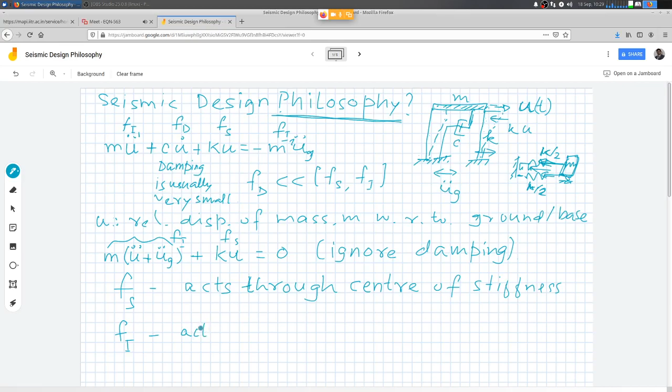Now tell me, these centers are points, right? So are these points coincident? May not be, sir. Okay, very good. So under what conditions will they be coincident? For symmetric structures, CS, center of stiffness, and CM, center of mass, coincide. There is no point in writing perfectly symmetric; symmetric is symmetric.

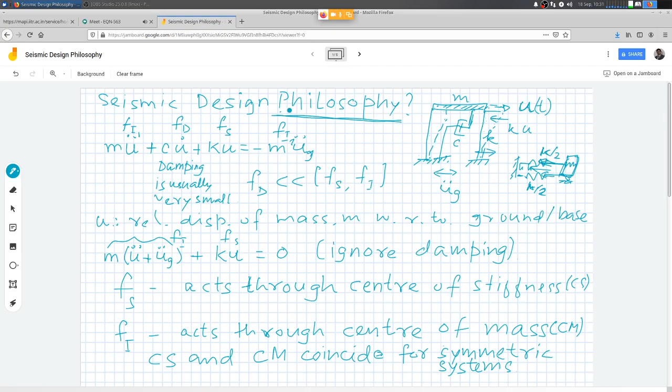For symmetric systems. Now what happens if they are not symmetric? So let me draw the hypothetical situation. It's not hypothetical, most of the time it is like that. For unsymmetric systems, let me just look at the plan.

Right, so you have one column here, one column here, one column here, and one column here. Now assume that these columns are of different dimensions, so that it is not symmetric. So this is column stiffness K1, K2, K3, K4 and so on. The slab is of course symmetric. So this is the centroid, what we call the center of mass, and let us say the columns on this side are a little more stiff compared to the columns on this side, the flexible side.

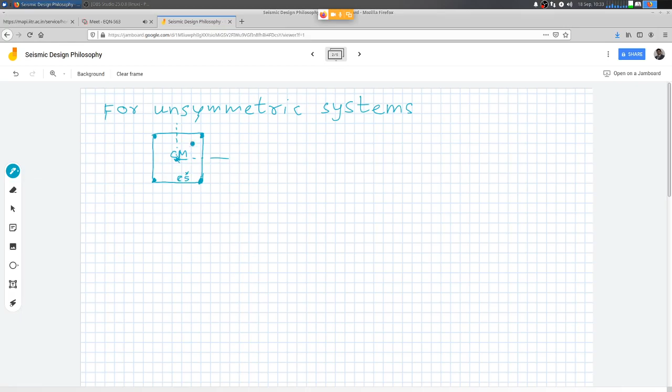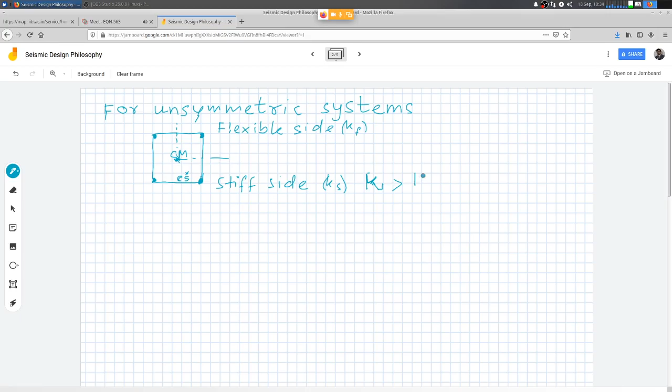So this is what we call the flexible side, and this is what we call the stiff side. So let's say KF, KS, and obviously KS is greater than KF. So you end up with the center of stiffness shifting towards the stiffer side.

Now before we go into this, if this is the direction of motion u, then Fs will act through the center of stiffness, right? And it has to be equal to the inertia force that we have here, that will act through the center of mass. So this is Fi. Now this is what we call eccentricity.

Now there can be eccentricity in the x direction, there can be eccentricity in the y direction. So if this is x, this is y, so this is Ex and this is Ey. And u is of course the displacement along the x direction, and there is eccentricity between the point through which the inertia force acts and the point through which the spring force, or the column restoring forces, act. And because of the eccentricity, there will be a moment, additional torsion.

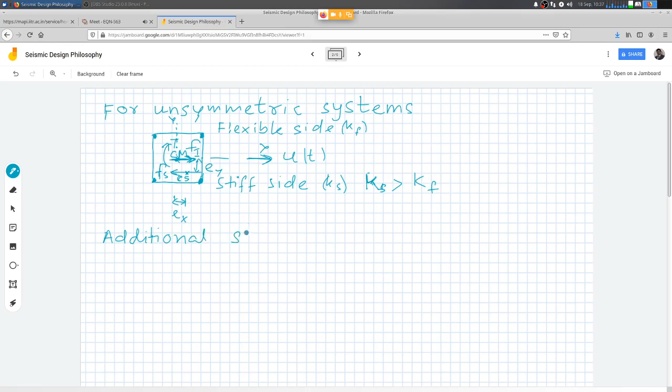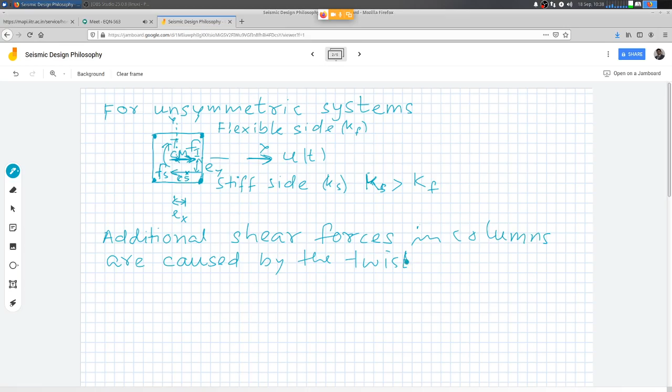So this torsion effect: additional shear forces in columns are caused by the twist on account of eccentricity between CS, center of stiffness, and center of mass.

Right? So if I had taken care during the planning of the facility such that this eccentricity is minimized, then I wouldn't have to bother about these additional forces in the design to withstand earthquakes. Now this is something very unique because this force is not coming because of any external loading. This is entirely because of the configuration, generated by structural configuration.

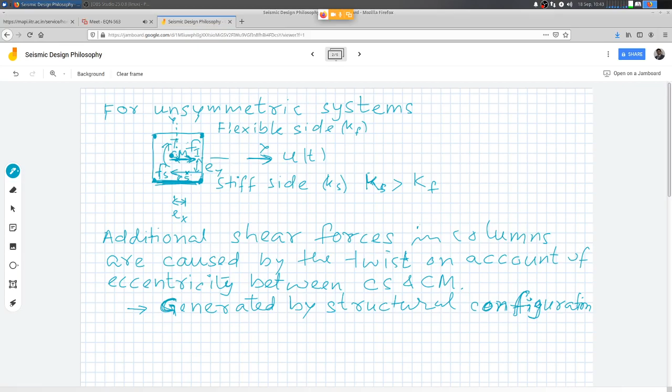Try to minimize it as far as possible wherever you can. And if you are aware of this possibility, then it is very much feasible to reduce this kind of unnecessary additional forces in design. Because it's not that we cannot design; if we can account for this, we can always design for these additional forces, but that is unnecessarily going to increase the cost of construction.

Just a minute. Yes. Okay.

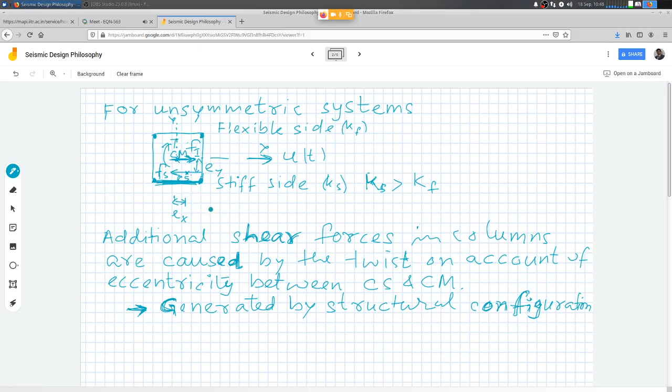So again, the easiest solution is to keep this possibility in your consideration when you are planning the facility, and that is why I always insist that structural engineers should always work on a project with architects right from the conceptual stage, right at the time of conceiving the facility architectural plan.

Otherwise it is going to be very, very difficult to come up with an economical structural solution to the problem, because most of the features that an architect will come up with are going to add to the eccentricity, and that is going to create problems later on. So we have this eccentric system. Now the other problem is, which earthquake do you design for?

Design earthquake, and more importantly, rather earthquake design criteria. How do you design to resist earthquakes? So what is a design earthquake? Any ideas?

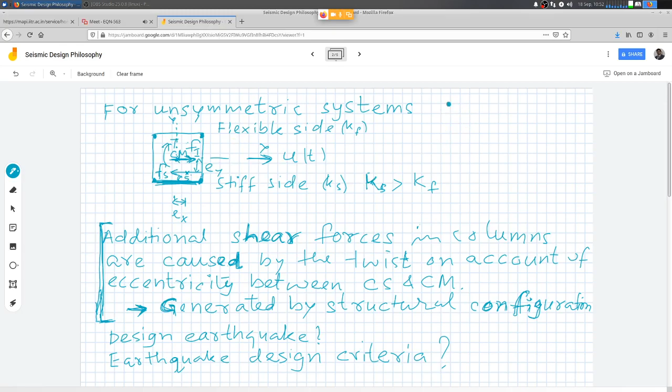Yes, so essentially you come up with what is called a design spectrum. There are different ways of defining a design spectrum. One is of course Newmark-Hall. That's the standard method of many design codes. Another one is the uniform hazard spectrum, where we make use of probabilistic assessment and come up with a design spectrum for the same frequency of occurrence, exceedance, right?

So that's how you come up with these 475-year return period earthquake and 2475-year return period earthquake and so on, right? All those are based on some probability models. You can derive the basis. You can come up with those numbers when you go into the probability models.

So the idea is you define the design spectrum for the site you are considering. It will be site dependent or zone dependent, and according to that site you pick the design spectrum that will characterize the earthquake ground motion to be considered for design. Now, for that design level earthquake, if I am considering a uniform hazard spectrum, the Uniform Building Code or even Eurocode talk about a 475-year return period earthquake.

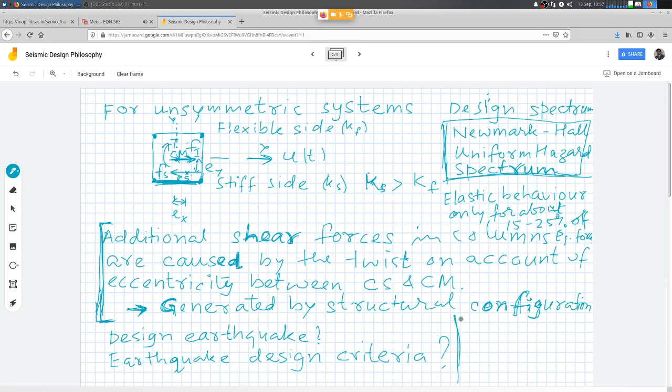So whatever forces I estimate using this design spectrum specified for the site, elastic behavior is ensured only for about 15 to 25% of that force. So when I admit that the structure is not going to be elastic for the entire earthquake force, the natural corollary is that the structure will sustain damage during what I call the design earthquake.

Now that is fundamentally different from your concept of structural design. So far you have never come across a situation where you say you are designing to withstand certain loads, and at the same time, without batting your eyelid, you also say that the structure will sustain damage during the earthquake for which I am designing the system. Right? So take a moment or a whole day to ponder over this very, very important statement. That is the basis of earthquake resistant design.